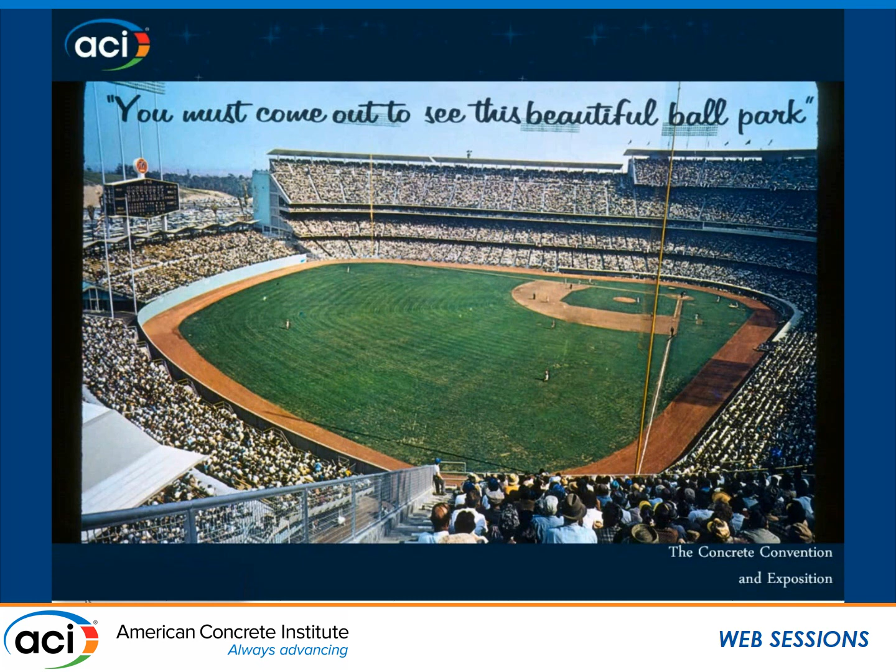I myself have had the honor of working on this stadium for probably the last 20 years. It was one of my first projects coming out of school, designing some netting and backstop around the back, and I've continued to work on this through my various firms, enjoying some very significant work in the last 10, 15 years with Nabih Youssef Associates.

So why concrete, actually? Mr. O'Malley simply wanted it to be concrete. It was just kind of a mandated approach, so fine, they adopted the concrete. At the very basic core of it, it's just a concrete frame building, and it's carved into this hillside.

You can see the very steep nature of the actual carving of this hillside. This is all bedrock. This comes into play a lot when we deal with how to renovate the stadium, how to find new spaces, and how to capture spaces back in this back void area. To save weight, this whole building is actually lightweight concrete. In fact, even though it's about 120 feet tall, their footings are 12 to 14 feet wide. It's just a much lighter concrete structure than you might expect.

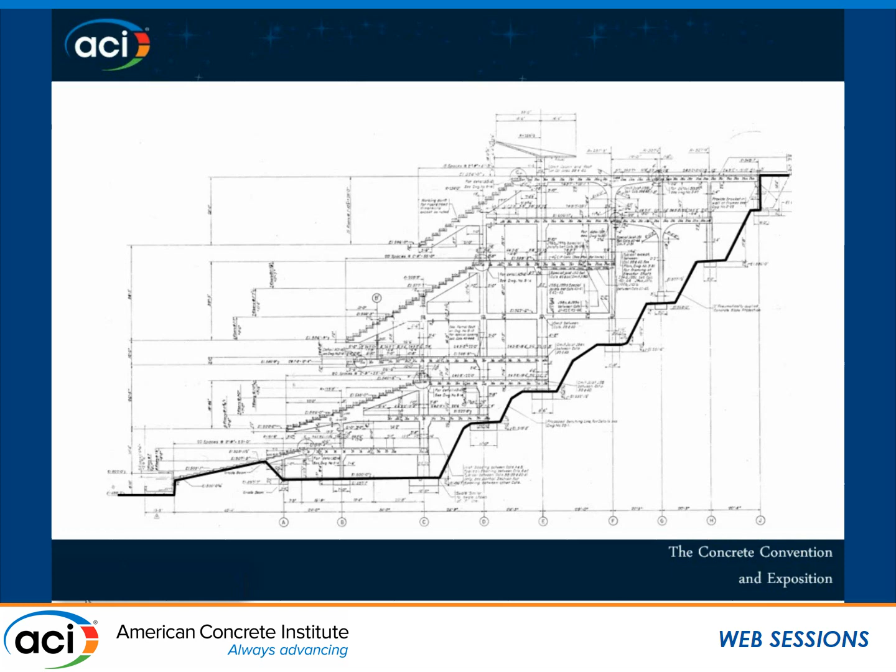I'd also say, for my own personal view, the drawings they put together for this building are just beautiful. They're hand-drawn, of course, with meticulous detailing and specifics of every nook and cranny. You just don't see this kind of drawing anymore. It's really a piece of art.

So why, if you're familiar with Dodger Stadium, is it called Chavez Ravine? It's actually sitting on a plateau on top of a hill, so why do we call it a ravine? It's actually built over top of two ravines that were filled in during the construction of the Harbor Freeway. There's up to about 120 feet of fill just filling in these two ravines.

It's a little bit of the checkered past of the Dodger Stadium site, not necessarily related to the Dodgers, but as they were filling this in, they had to relocate some communities up there. Originally, this whole site was actually earmarked for low-income housing, high-density low-income housing, but a change in the political environment shifted that out of this area, and it became the public venue of this Dodger Stadium.

So the result of that, frankly, is that as they shaved the top of the hillsides off and filled in the canyons, half of the stadium is on very deep fill, the other half on very stable bedrock. That's why you saw this very steep hillside construction - that's actually on the bedrock side. But if you go to the fill side, you have very shallow construction processes there. This is where you start to see the civil engineering come through.

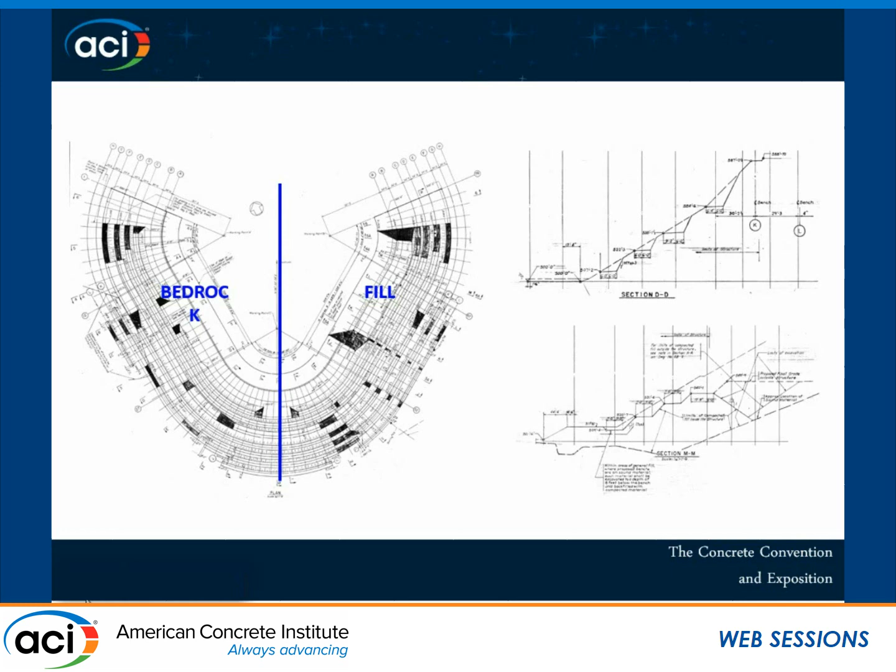They actually took section cuts at every key section of the building and created grading diagrams, grading plans, grading sections with points of grading. You just don't see that kind of detailing anymore. This was actually part of the structural drawings, which is pretty amazing. So how do you actually build this? It was actually a precast, site-cast, precast concrete structure - a very progressive design. This is kind of the placement drawing.

It was a bit of a jigsaw puzzle, essentially creating these large pieces that they would site cast and then lift into place, connecting with precast planks and infilling with structural concrete that bonded the whole system together, creating an emulative construction. They were really trying to get to a cast-in-place concrete construction method with this precast version.

It proved to be a very effective process, and they had lots of land to actually site cast this. But the level of detail of how to put this jigsaw puzzle together was pretty astounding. There's over 23,000 precast units, about 40,000 cubic yards of concrete in this building.

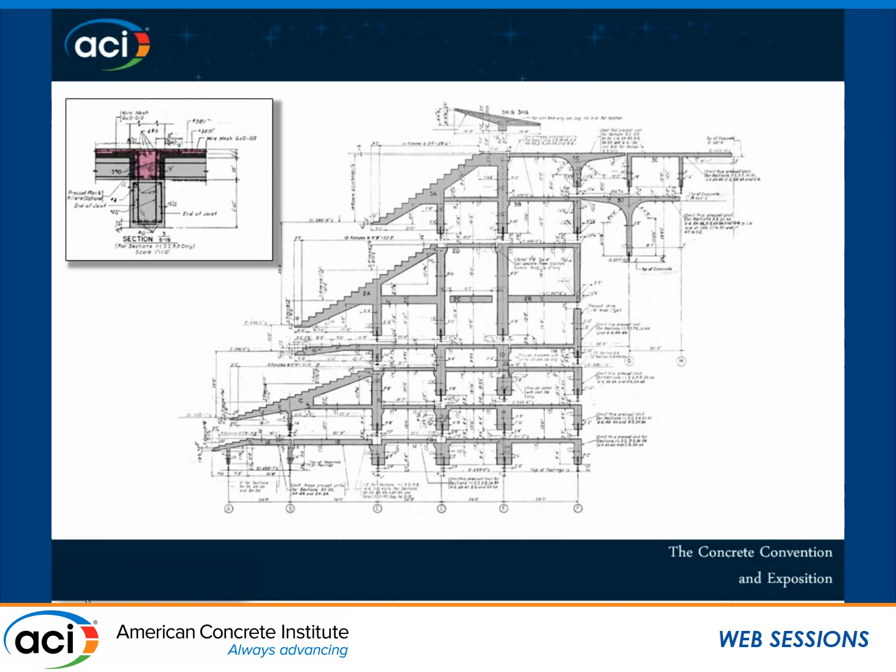They really had to struggle with how to effectively put this together in a very efficient way. So they issued, in fact, one of my favorite drawings in the whole drawing package, this whole series of crane placement diagrams. I'm just in love with this particular drawing because the level of detail they took is astounding. They're actually showing the sequence of these gantry cranes and how to place them piece by piece to be the most efficient construction procedure.

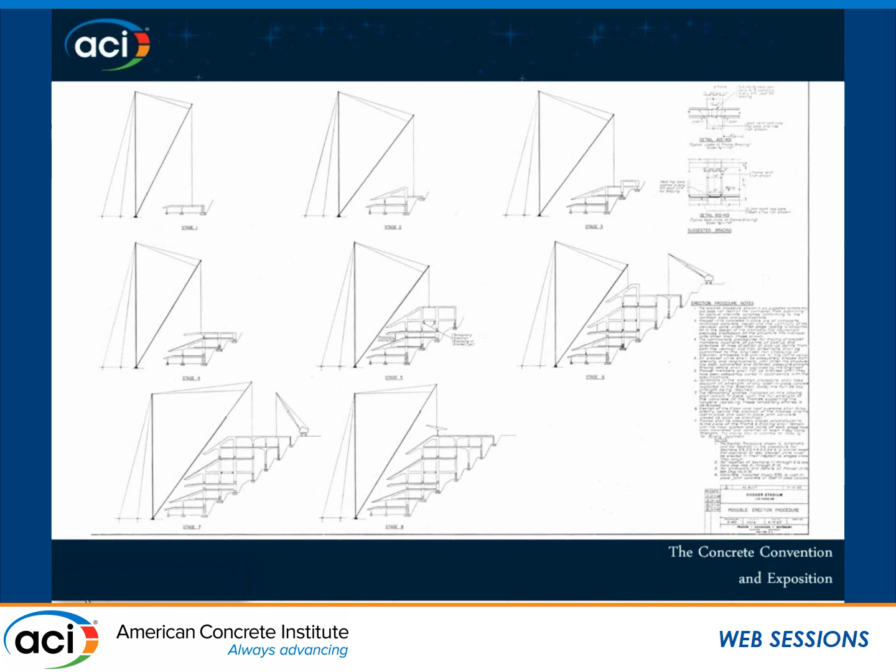They have a little note here that says this is a possible erection procedure, but they hoped they were going to do it this way. I think partly they're also just kind of showing off here - this is the bridge engineer in them coming through.

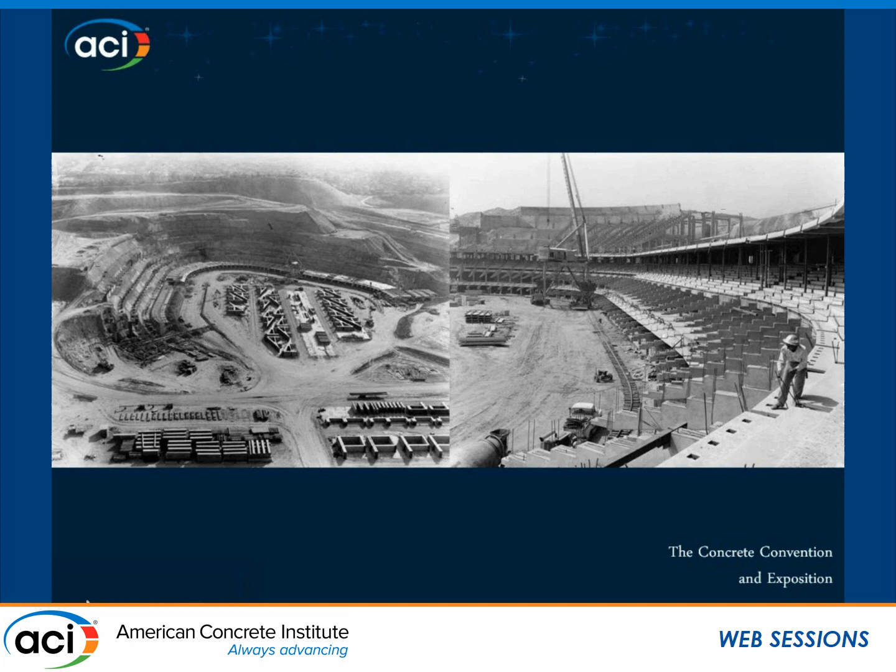So the early grading and construction, you can see as they're starting to grade this whole thing, carving it into the hillside. Again, this is the bedrock, very steep side - this is the fill side over here. You can see they actually did use the crane idea, but they have it on this rail system so they could maintain specific alignments. So it was all very meticulously done in a very large-scale way.

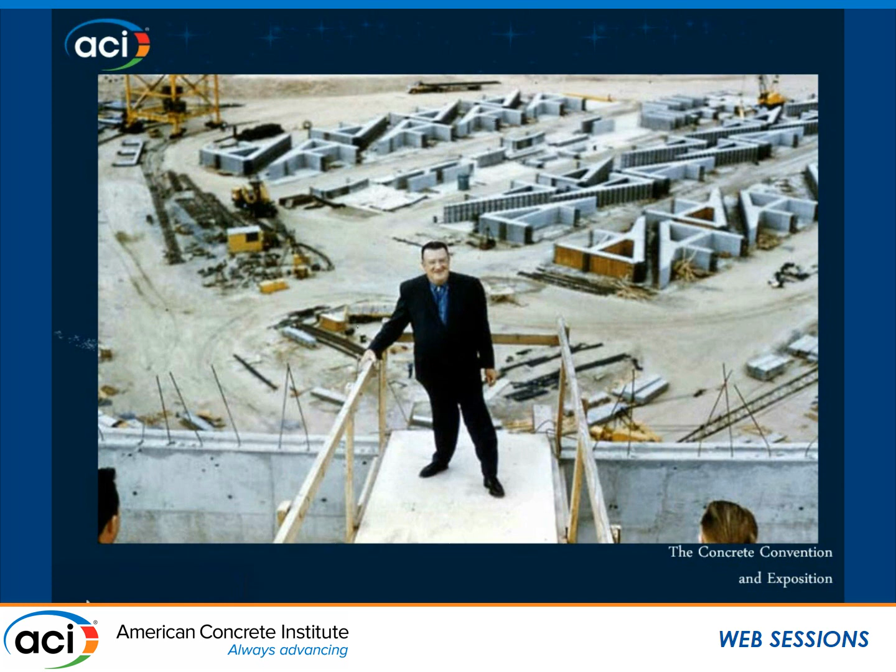Picture of Walter O'Malley, kind of the proud owner, as he's looking over the casting yard, if you will. You can kind of see these stacked precast units looking very deep, but in fact it's 2 units because there's identical units on each side of the stadium. This symmetry was very important to them.

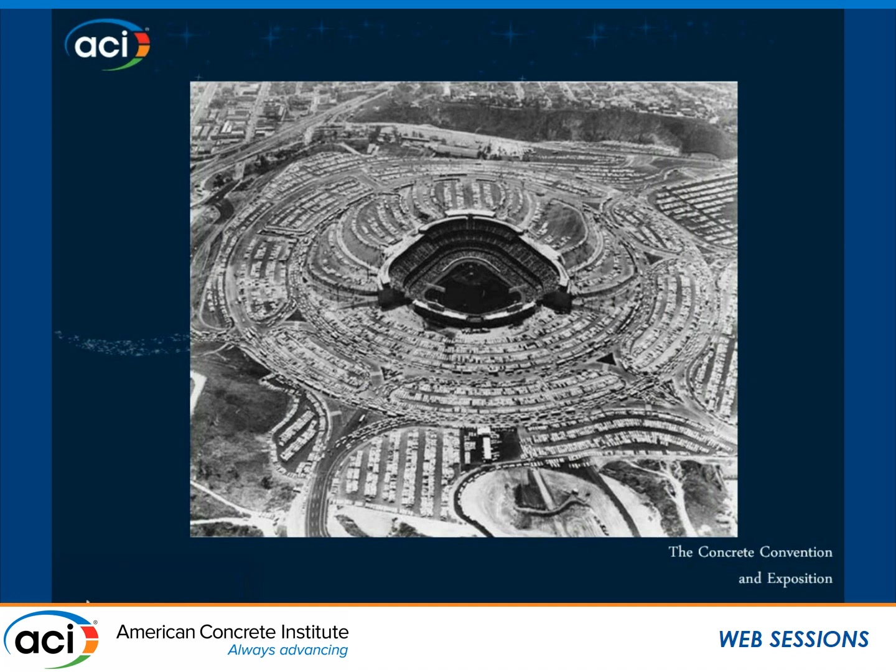The other thing that they were very cognizant of was the idea of the automobile. This is Los Angeles, so that is kind of the indelible icon of LA even at that point. You can see the massive amount of land that is up at Chavez Ravine.

And the logic of how they were getting people around the stadium is very evident. There's a lot of ring roads. There's in fact 6 primary exits, so it's actually really fast to get in and get out. Despite the fact that there's 50-some thousand people, you actually can get in and out pretty quickly.

You can also see another fundamental aspect of the design, which was they really wanted the patron or the fan to park on the same level that they were going to be sitting. So you can see this very tiered kind of parking lot structure to it. So if you were parked up here, you were coming into the top deck.

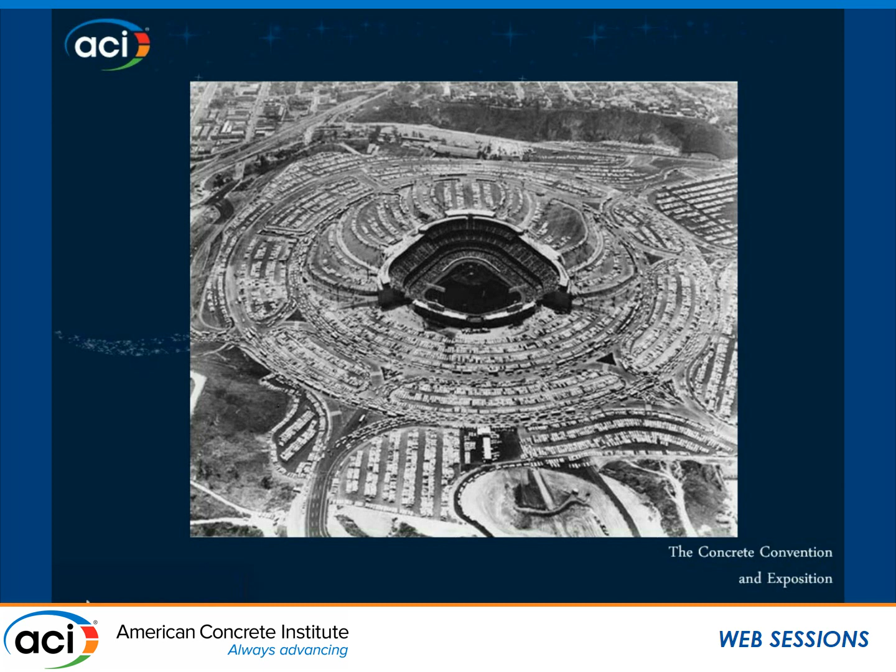The result of that actually is that there's not a lot of vertical circulation in the stadium. It's actually hard to get from one level to the next, which has proved to be one of the challenges of the current ownership, to maintain relevance in the modern world of concessions and points of sale. There's some levels that have wide concourses that are amenable to that, and other levels that don't. So how do we get the patrons up and down this? This is still something we continue to try to improve on. But the logic of how they laid it out was very clear.

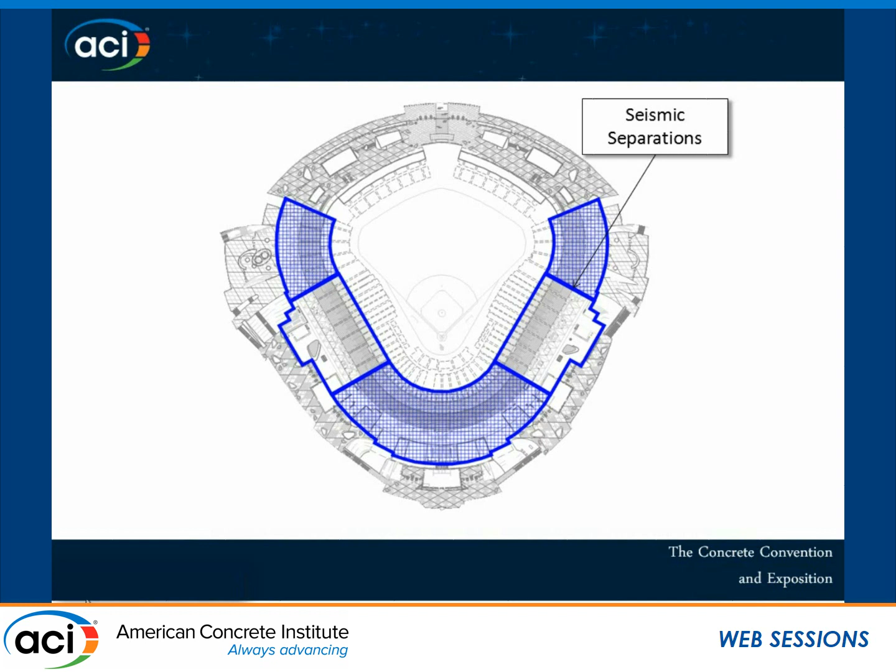So the seismic design - being a structural engineer, I'm always very interested in this. It's actually comprised of 5 distinct sections, 5 different buildings highlighted here. It's fundamentally, in this circumferential direction, a shear wall system with the shear walls kind of straddling right up into the joint. These joints are up to about 14 inches wide.

So again, it's a very forward progressive thinking design. In the 1950s, they were trying to anticipate movements of the upper joints. 14 inches sounds like a lot, but in fact, at 120 feet tall, that's only about a 0.5% drift each side.

So it actually was something we had to address eventually. In the radial directions, it's basically all moment frames. The entire precast frame is just one moment frame. So it was a very robust and very redundant design.

Again, I would say very forward thinking. The concrete is very robust. It's got lots of confinement. It's got high strength steel in it. And the concrete has fared very well. The strength is very good.

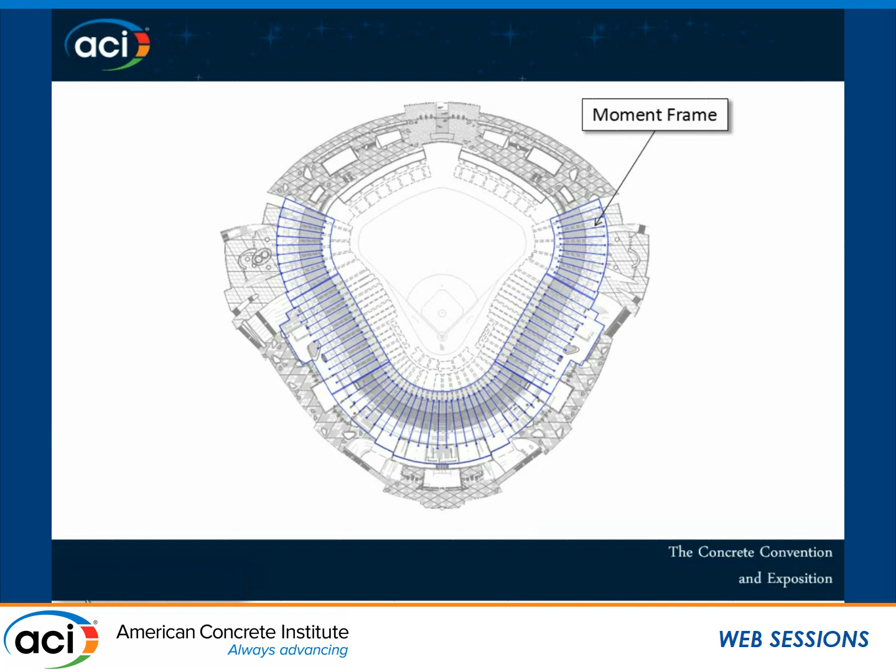So perhaps the first really renovation or preservation project they undertook in a major way was addressing the seismic concern, a real structural basic concern of the stadium itself, maintaining the relevance of the stadium and its own structural stability. So about 1997, 1998, 2000, we launched into a very aggressive full structural seismic upgrade. This was just shortly after the Northridge earthquake.

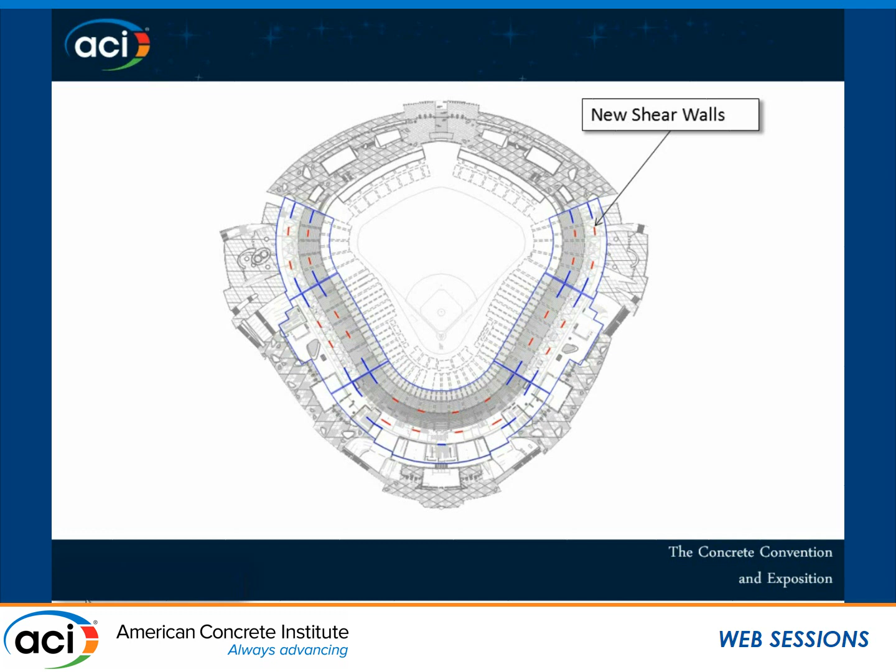So they were very keen on this idea of addressing this issue. We used the newly published FEMA documents as far as retrofitting existing buildings. These are still very much in practice today, they just had some evolutions to it. So it maintains its relevance that way.

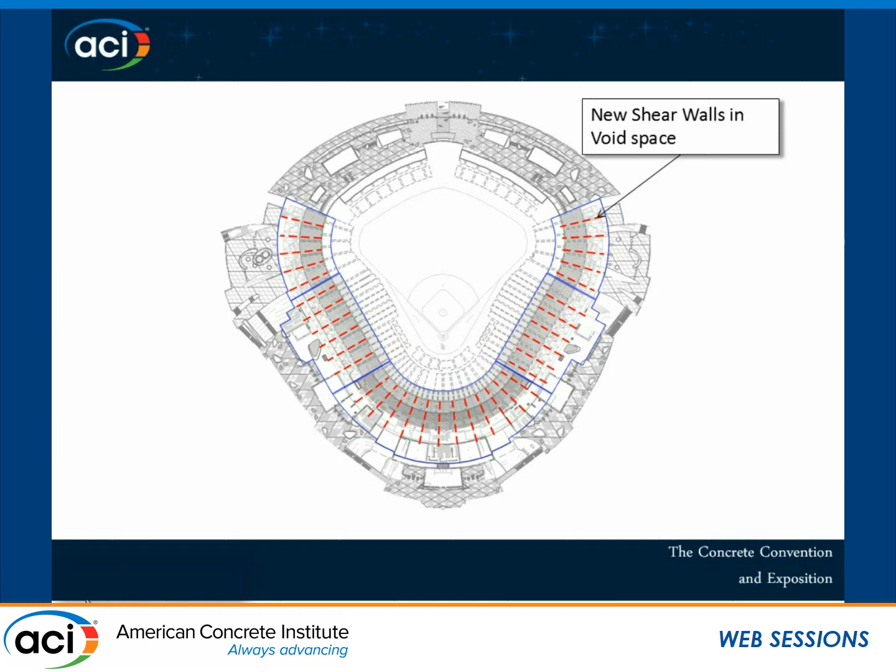We added some shear walls along the circumferential direction in places we could kind of hide them. We actually added a whole bunch of shear walls in the radial directions to relieve the entire moment frame from its active duty as the seismic resisting system. That opened the door, frankly, for the Dodgers. What that allowed them to do is now unburden all the columns with seismic forces, and then we could just use them for the gravity forces, which opened up a world of opportunity for them to expand.

Also fiber wrapped the canopy at the top because we know the top shakes a lot of acceleration up there. But what this allowed, frankly, was now they could start to push into the void space and they could find this additional space. And this was the real catalyst for the first kind of expansion of the stadium, which wasn't forward, it was actually backwards.

They weren't trying to add more seats. They actually were thinking they maybe had too many seats because they couldn't have enough amenities to serve all those people. So they actually were thinking maybe a little less seats, but much more amenities. And where do you serve the amenities? It's all back of house.

So the first real push was go into the big void. And so we basically just filled a bunch of this void with back of house space. It was mechanical, it was food service, it was concessions, it was new mechanical, electrical, plumbing. All of this stuff now found a new home. So that was the first big advancement that they had.

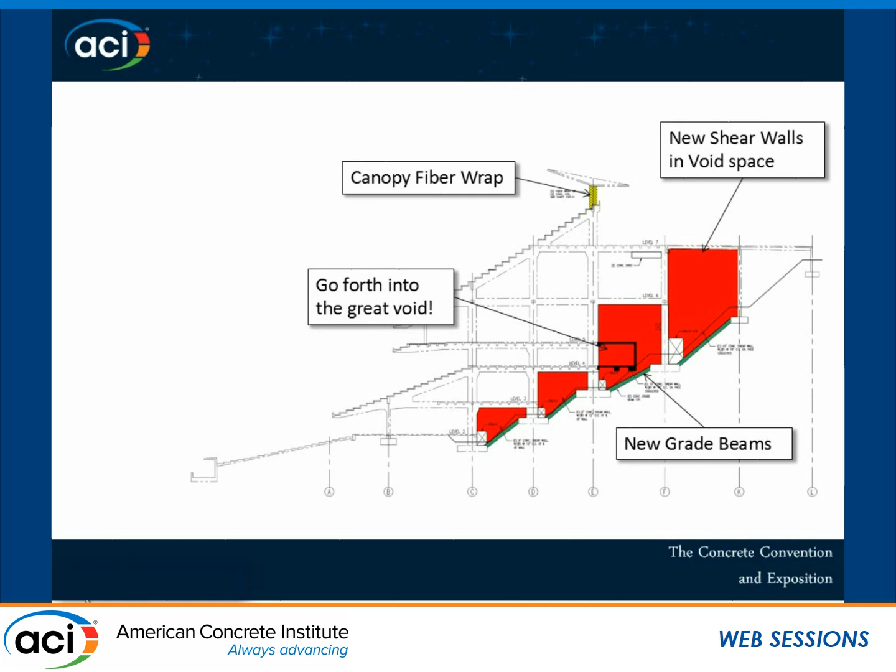And you can see kind of the result of all the work prior to the new. The character's largely the same. It's just now they've added all the amenity fan-based things around the outside. Again, preserving that modern feature.

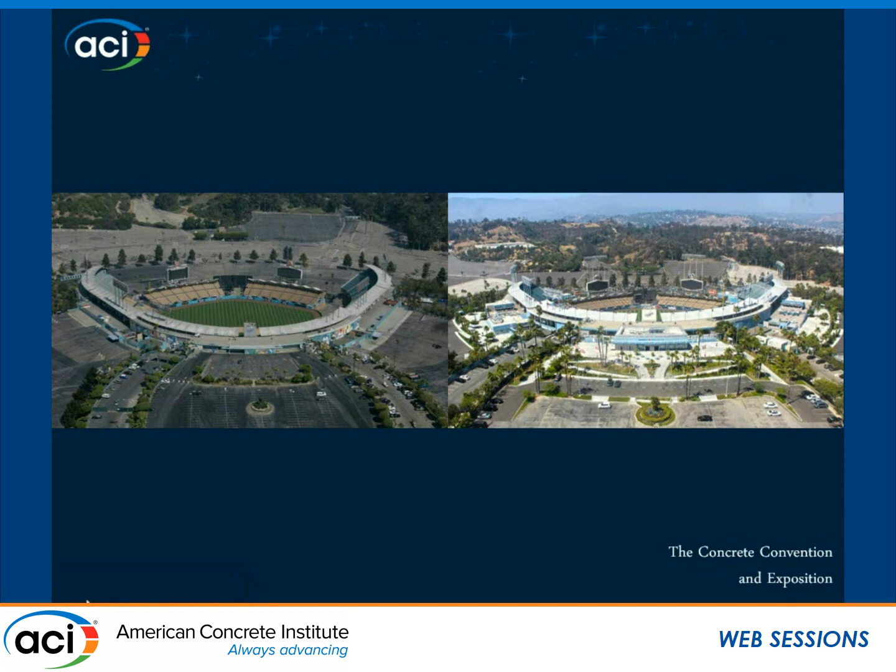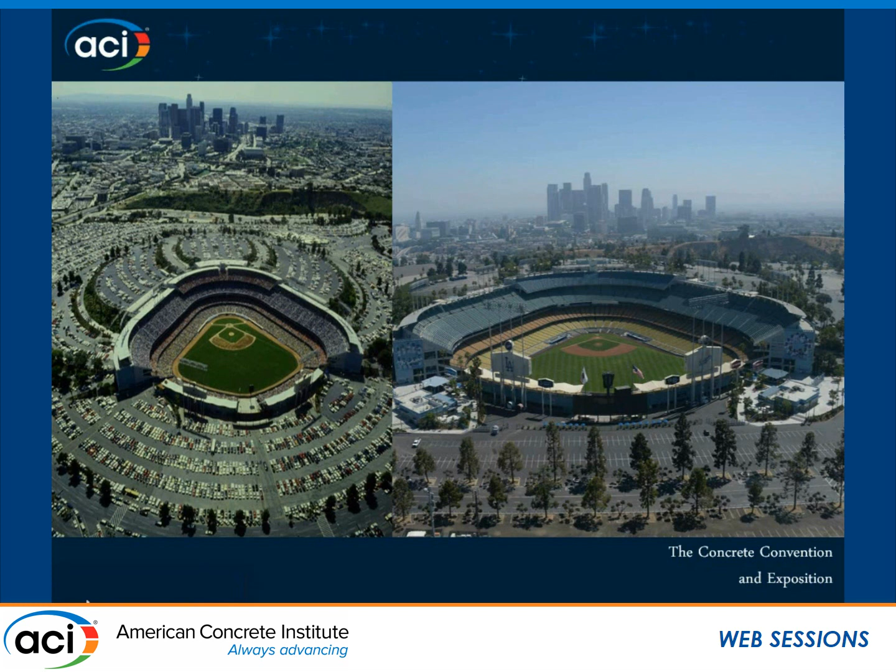Get another view. You can see they actually restored the scoreboards. They kind of went through this period of rectangular. They restored them, of course, in a hexagonal shape and, of course, in a symmetrical way so that they can maintain that.

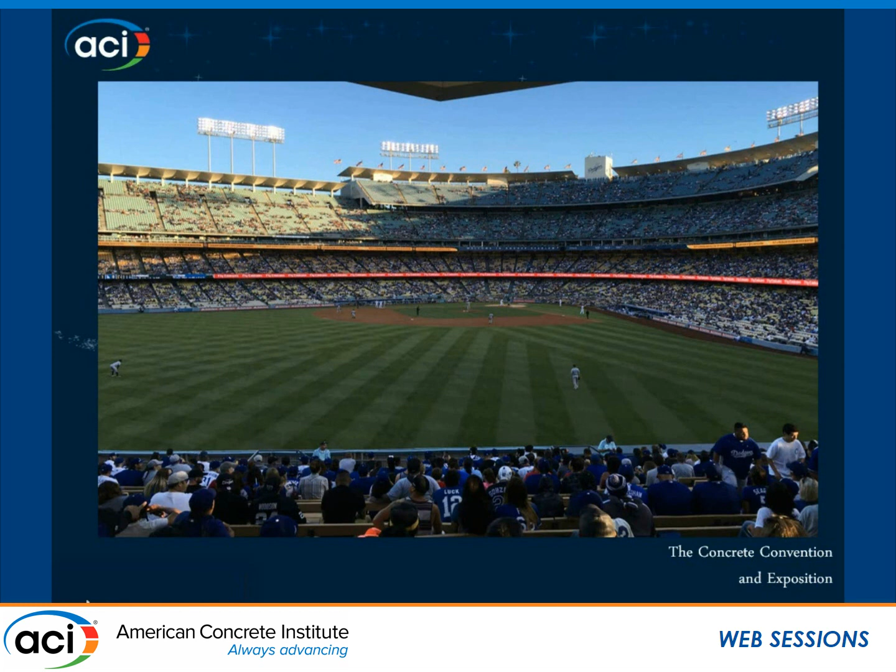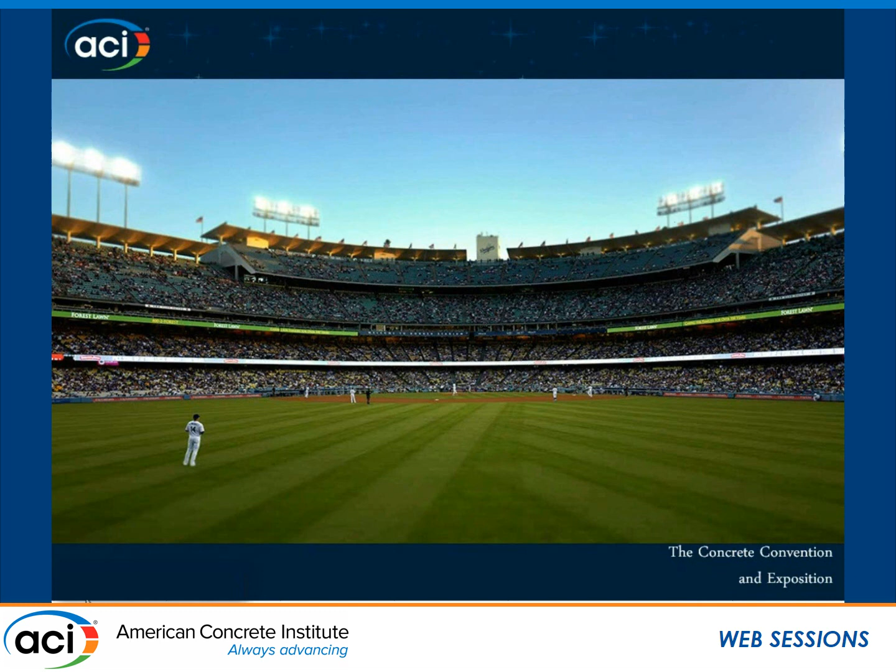Janet Marie always likes this slide to highlight the idea that the original design, in a very subtle way, in a very architectural way, the early morning and afternoon sunlight really kind of glows on this upper canopy, and she loved that idea. So in fact, one of the ways to celebrate the original architecture was actually put lights up there. So at night, you actually feel like it's doing the same thing. It's trying to get the sense of lightness of the stadium. So these are kind of the subtle ways that they're doing to try to maintain that original architectural vision.

But they still needed more space. So this was the back of house space, so the seismic, and now they actually have to address the players, those poor neglected players. They had not ever actually done any upgrade for the players since the 60s, essentially. So the clubhouse was the same, but they needed the clubhouse. Where do they put it? They didn't know where to find the space.

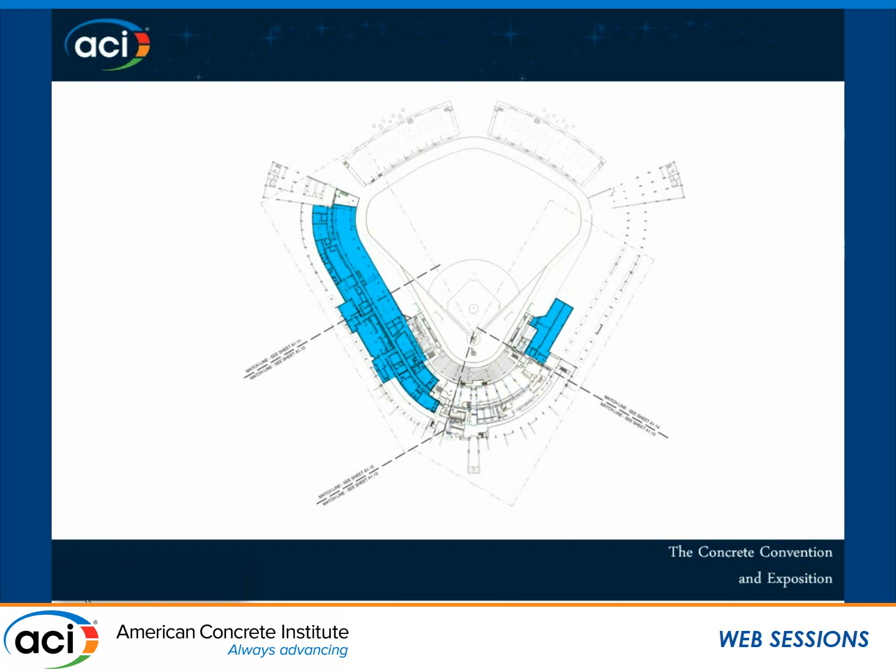Well, they finally discovered, maybe we'll put it underneath all of the field level seats. As a precast construction idea, we would say, I'll do it in precast again - it'd be very fast, very quick. But in fact, we didn't have enough time to actually do the fabrication drawings for the precast, so we elected

to go cast in place for that. It actually gave us some flexibility to adjust to changing programmatic requirements - that's code word for the owner changes their mind - and where we could also adjust to field conditions that frankly weren't exactly as we anticipated.

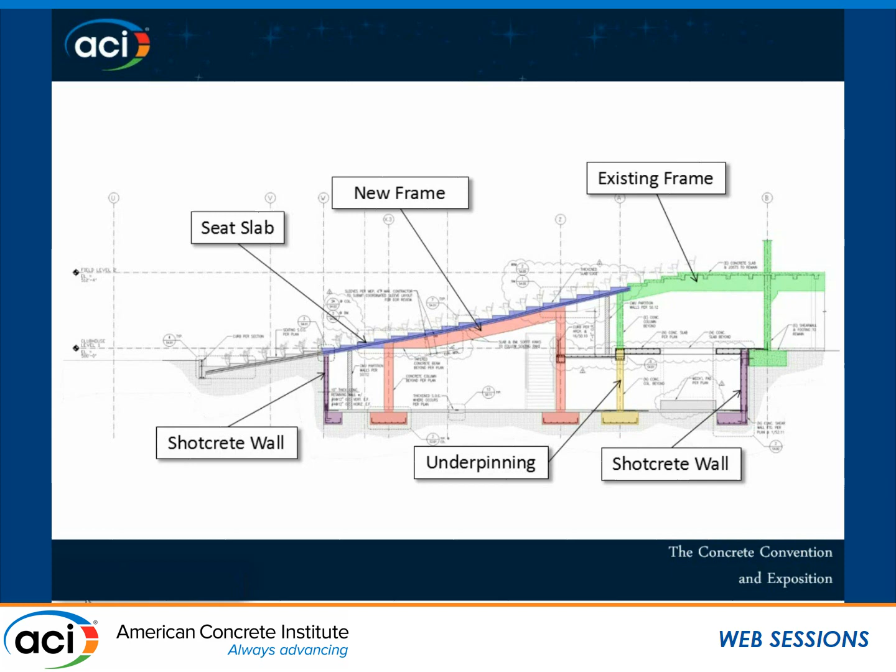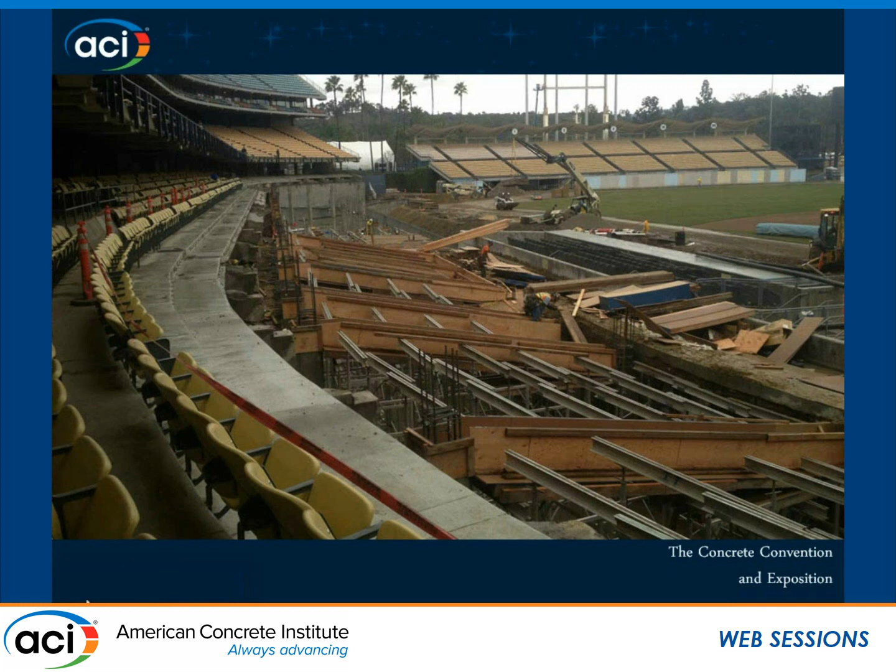So they had to do all this in 4 months. They ripped out the entire field seats, demoed it all out, shored it up. This was probably like a month later. You can tell this is the middle of winter because some of the guys have their really warm t-shirts on - this is Los Angeles winter.

Through this period, they had about well over 100 permits to try to pull all this stuff together, because at the same time they were doing concessions at the top, they were doing outfield concessions, kind of bringing the whole outfield experience back into the park.

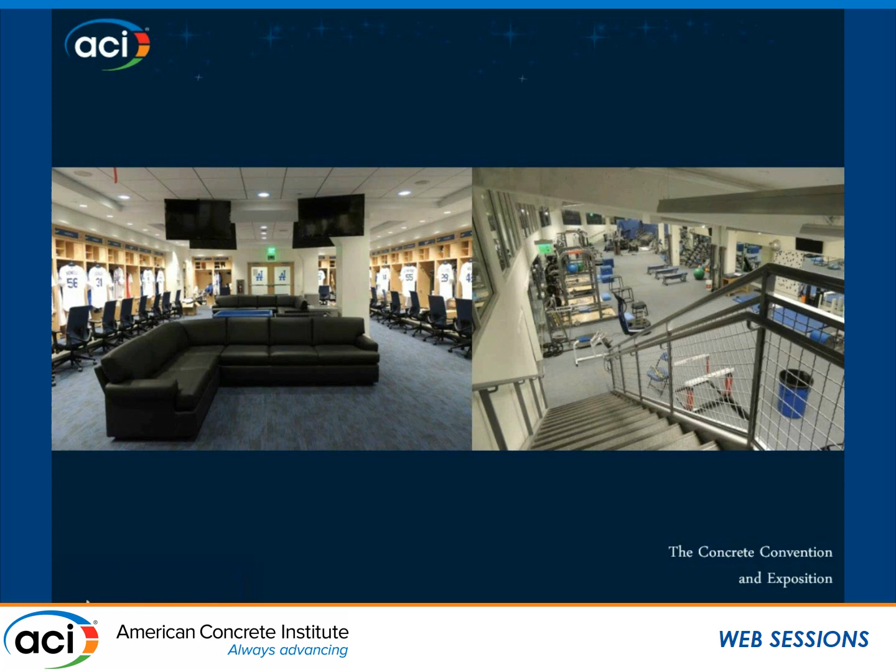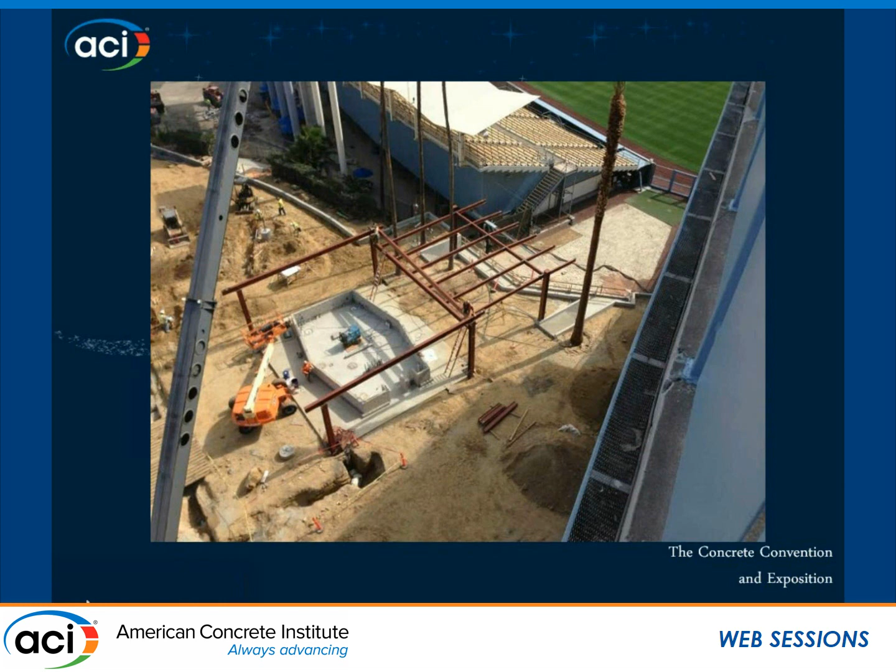This is the weight room that's actually under the seating slab. They added some bullpen bars - you can see the hidden Mickey right here. There's our Chevron shape that's actually functioning as a bar. So they'll find any ways they can to do that.

They regraded the entire outfield to try to bring that fan experience. Really the idea was that they're trying to connect all of these people from the pavilions to the main stadium, which had never been there before. So they're finally able to connect this all up.

They added concessions up on the upper levels, on the 7th level - again, bringing that modern amenity feel to an old ballpark, because this is what all the new ballparks are doing. It's all about point of sale, concessions, and getting people moving around.

So that building we were looking at, the reason why these aren't very easy to do is, in fact, that building is actually on 3 different buildings because it's straddling on grade, it's on the structure, and it's actually straddling a seismic joint. So that little tiny building, we actually had to slice it into 3 pieces. That was sort of the challenges you have to work through.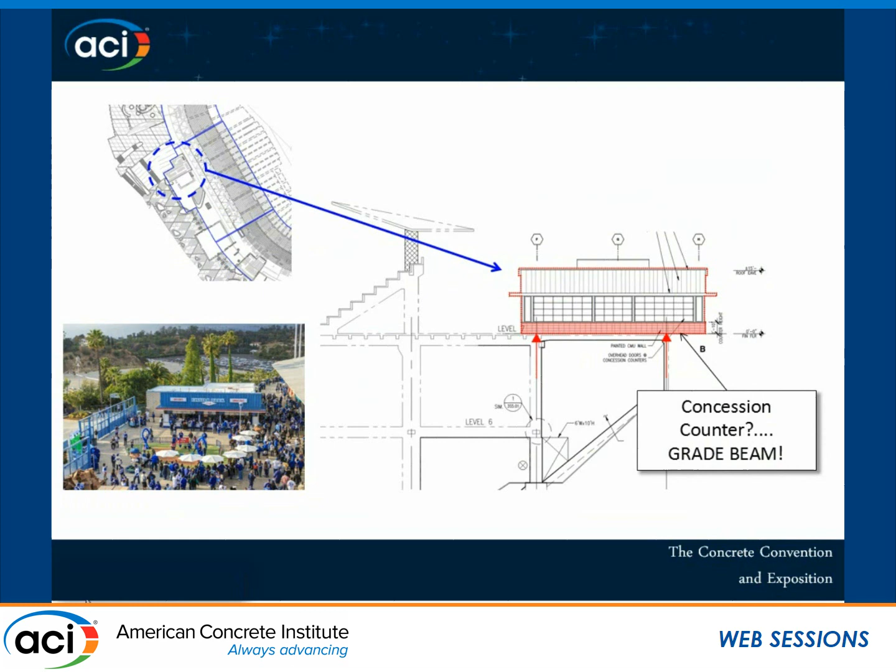Also, this little guy here, they couldn't get under there to actually shore up to do the beam work to strengthen and hold this building. So in fact, we said, okay, let's just use the concession counter as a grade beam and just span it to the columns and sit it on the stadium. Again, we could do that because now these columns don't have to take any seismic loads, so we had a lot of reserve capacity.